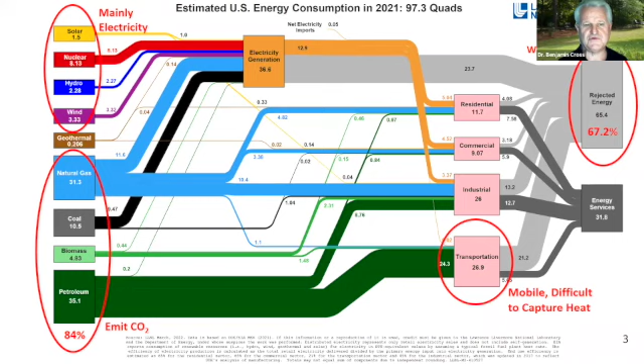I always advise people to look at these charts every now and then and look at them in detail. They can make your eyes run together a little bit, but this really gives you a realistic picture of what energy is being used and consumed in the United States.

Now I want to talk about those critical success factors. You're going to make a paradigm shift. You need to know what's going to be successful.

Well, I think this whole meeting has been a lot about integrating diversity. I tell people everything you do, it's critical that you integrate diversity. I don't care what business you run or what operation you do, the people who integrate diversity the best are the winners. Just look at Bill Gates or Steve Jobs - that's just in the high tech areas of information. But if you go to any operation that's got to be done, those who can actually integrate diversity the best are the winners, are the most successful.

Let's just use the word successful. The second critical success factor is what I call IQ - that's the iteration of integration and innovation. That means you integrate for what you already have. Take what exists, what you have, get it integrated, get it working together and being efficient with each other. And then second, you need to innovate for what you don't have. That's where the R&D comes in.

That's where the pilot plants come in, that's where the demonstrations come in. And then you want to integrate that innovation in. And then the last word again is iterate - just keep repeating that over and over and over. That's what we got to do to be able to keep bringing ourselves more successful. As I was beating my head when I worked at Savannah River National Lab - continuous improvement. This is all about continuous improvement.

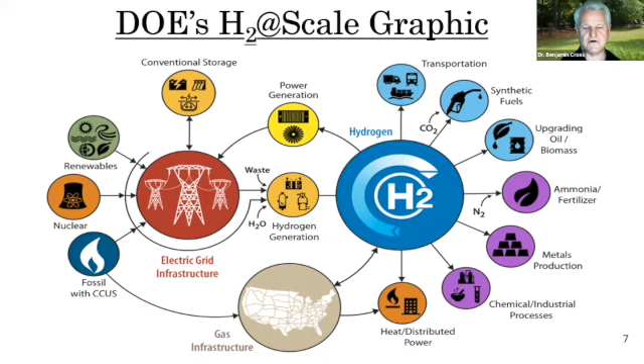This is DOE's attempt about bringing together what to do with electricity and with hydrogen. And you see all these different industries that are on the side as well. And so let me go ahead now just to tell you a little bit about closed loop manufacturing, because that's sort of key to this. That's a little different. That's adding on, because I'm taking some of those things on the right side and bringing them even closer together. Closed loop manufacturing, which a lot of technical people like to call industrial symbiosis.

Typically today, we have a very linear approach. We bring in resources, typically natural resources, we make a product, and then we have waste, and we have byproducts. If we want to move more towards a circular economy, which is where we need to head, recycle materials, we need to be able to take that waste product, add some other new materials as well, make a product, and then that waste, the byproduct that comes out of it, feeds another factory that I say really needs to be co-located to be able to do that.

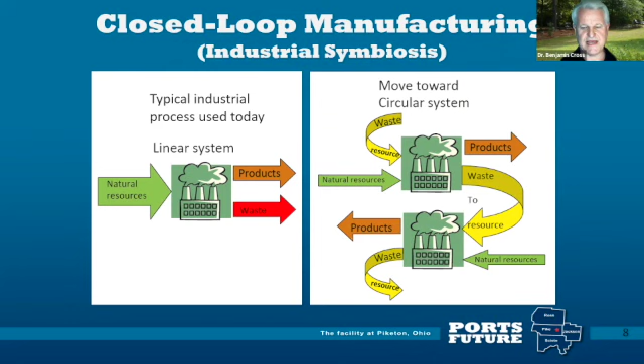Because if you have transportation of materials, the more you have to move it, that's just like overhead cost. That's money that's being spent that doesn't have any value added to it. Now, the project I've been working on in Ohio, that's why you see down here about the Ports site, that's Ports Future. We want to transform that facility to an integrated energy system closed loop manufacturing complex.

So this is just sort of a simple block diagram. This block diagram is really made for the local community just to see, across the bottom here, some of the products that you would make. Obviously, from the power side, if you're located in Piketon, Ohio, at that facility, you're co-located with the largest natural gas reserve in the world.

So you start off with the natural gas. You got a lot of woody biomass in the area. You got a lot of agricultural grasses and crops could be grown as well. You got large cities that's not too far away. It's got a lot of municipal solid waste.

And we show nuclear fuel as the future, because we're talking about you want to get started with what you have and take those heat sources, and those heat sources combined in with renewables like solar and wind to make electricity. Because again, they strictly basically make electricity. As we know, there is some solar that does heat out in the West, but for most purposes, solar goes to nothing but making electricity.

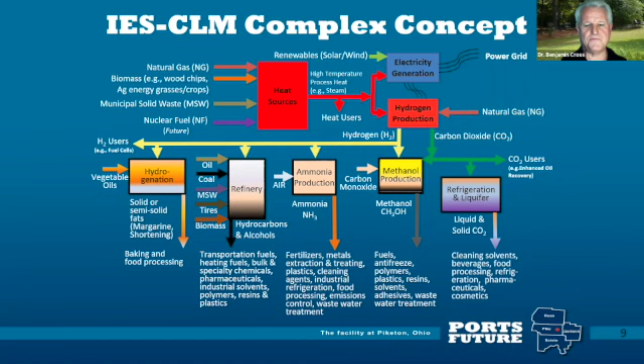And then we show making hydrogen, starting off with natural gas, steam methane reforming, but also doing carbon capture and using the carbon, the CO2, for a bunch of different uses, but then taking that hydrogen and using it for multiple uses as well, where these facilities making these intermediates or final products would be co-located together at the Portsmouth site. We like to affectionately call it just Ports.

But to really show addressing that issue that we talked about before, which is really the waste heat, we envision this particular complex addressing that. Our goal is to utilize the heat at every temperature level. And here's where for the process heat, this is what we call thermal management for the technical people. But co-location is key to thermal efficiency. When you have something that's hot, like your stove, put your hand over a stove, you move your hand out just a little bit, it drops off pretty fast.

You can move electricity, that energy carrier, pretty easily. Hydrogen, you can move fairly easy as well, but it's going to be a little bit difficult in the early years. And when you try to get a hydrogen pipeline network in place, I even say if you're going to go with hydrogen, you're going to need to co-locate initially, because the best place to use hydrogen is where you make it. The best time to use it is when you make it.

But back and focusing here on this thermal heat of use, when you see the Ports site in the middle, that's roughly a 1,200 acre site. That's where we see the high temperature, high hazard, high security, high dollar investment facilities, like making the electricity, making the hydrogen, maybe making ammonia, making methanol, a refinery. When I talk about a refinery in the generic sense, it could be doing petroleum, biomass, any carbon feedstock, like even municipal solid waste. Metal extraction and treatment, you do that with the high temperatures.

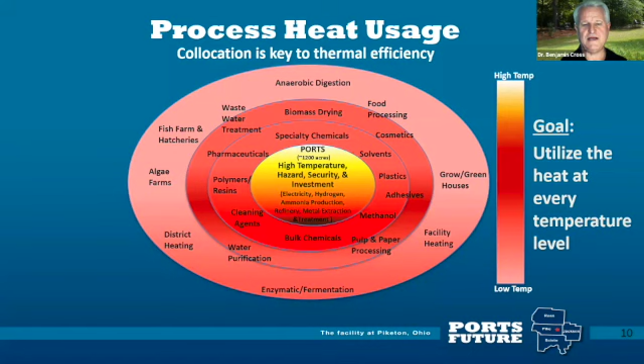This is where we're talking temperatures probably close to 1,000 degrees C would be ideal. And some reactors we know aren't capable of that yet. But from here, as you've sort of got concentric circles going out, you have various products being done as you get to lower temperatures. So you want the heat of one process to feed another. And this is just a different diagram of the same thing, shown in a different way. So how you would cascade these systems together, or what we call daisy chain them together.

How you'd have this process heat, however it's generated by the fuel source, either natural gas, maybe initially biomass, municipal solid waste, but ultimately nuclear needs to be one of the key factors in this particular facility, or any kind of integrated energy system, closed loop manufacturing complex. And then down here at the low end, there's all kinds of uses for low temperature heat that can be utilized. I'll just only point out, for time's sake, anaerobic digestion.

We now dump our waste into landfills and put French drains in there and put a vacuum on them that sucks out the methane so it doesn't go up into the atmosphere, so we can use it for other processes as what we call renewable natural gas. Well, we really should be putting those in tanks and making renewable natural gas on purpose under perfect conditions.

That's the same thing with the grow houses and the greenhouses. Grow houses now with LED lighting, you can grow food indoors. Anything you put in a salad, and I'm a salad fan, basically can be grown indoors. One thing that I learned in this process, the average tomato travels 1,800 miles.

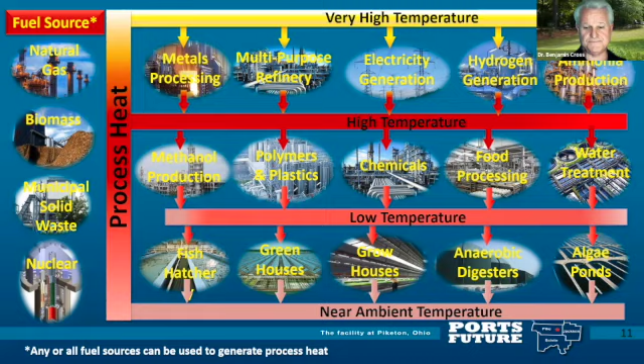That's a lot of CO2 being put out just for that tomato. And don't think the tomato is being raised for flavor or for nutrition. It's being raised to be transported. So anyway, there's a lot of benefits with this.

One of the key benefits is what I call really stewardship, but it's effective resource management. And for most people, that's cost savings. For most of us engineers, that means higher overall efficiency. We engineers are taught about overall efficiency, especially thermal efficiency. But it also applies when we recycle water and the materials, including the CO2, where we actually want to repurpose that CO2, not just to bury it, not just to let it go into the atmosphere, but to actually utilize the CO2 to turn into other value-added products. That means better utilization of capital equipment and lower operating expenses.

When you're co-located at a place like the Portsmouth site, you got a heavy industrial infrastructure, and you got facilities and personnel that can actually be shared. You share those facilities. And then there's shared processes. Almost every industrial process, you got common support systems like chilled water and compressed air and emergency fire water systems and security systems. There's just a lot of duplication of effort between one facility and another. If those facilities are actually co-located, they can share in those types of shared processes and resources that are available to them.

Also, of course, one of the key things we want to look at is the use of domestic renewable resources. You want to be able to utilize things that are local, and we want to reduce waste and emissions. We want to minimize, get down almost next to zero, if at all possible. And with that closed loop manufacturing, the idea is to drive down to almost what we call net zero or zero emissions. Can you get there perfectly? No, but you need to move in that particular direction.

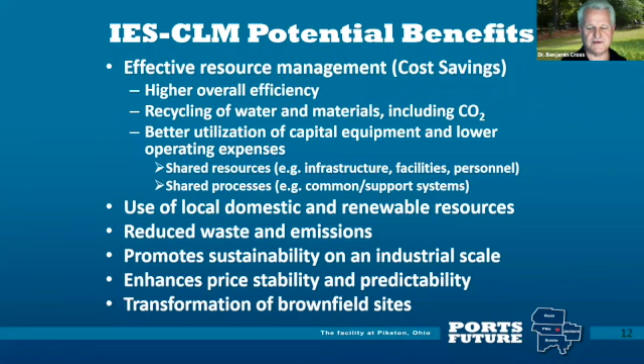And of course, what's important to the Portsmouth site and to a bunch of other sites that I know people have mentioned here as well, like former coal-fired plants, you can transform brownfield sites. We don't need to go be disturbing new greenfield sites. We got plenty of brownfield sites that we need to repurpose and transform into the new energy economy.

Now, the challenges that you have. This has been brought up as well. Integration is great to talk about, but getting multiple organizations working together, just planning together, you first got to get the people to talk to each other before you ever get any systems integrated. I think once you get the people, and now I'm really talking about the CEOs, the executives, the captains of industry. By the way, I know some people would say we need to have government help support and provide incentives for this, but we need the captains of industry to recognize it's in their best interest, to be globally competitive, to start working closer together if they're going to be successful in the future.

And so you really got to get the people talking to each other. Once you turn that over to the engineers, us geeky engineers will just have a field day of integrating these together. Then we'll be trying to outdo each other, how neat we can pull and do this together, just as you see what Apple has done and what you see that Microsoft and many other companies are doing today.

But the problem is you got a large capital investment. When I looked at the port site, I thought about $40 to $50 billion could be invested there in putting this complex into place. Well, I see now that Plant Vogtle is already costing over $30 billion. We don't need nuclear to cost that much. We need to bring that down, but any kind of large facility like this is going to have a large capital cost.

And then there's big security, and this is investment protection for the people who invested their money in this and want to make sure they get their money paid back from it. It could be issues associated with the security of it. We can't forget there are always terrorists that maybe want to go after us, either from a cyber standpoint or physical security, when you have things that are co-located together in any kind of industrial complex. It requires unique sites like the Portsmouth site.